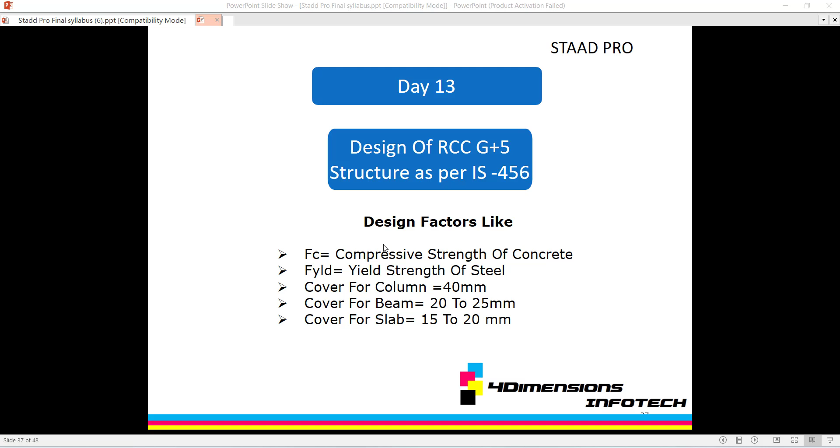Clear cover for column is 40 mm, clear cover for beam is 20 to 25 mm, and clear cover for slab is 15 to 20 mm. You should know these values first, only then can you design the structure.

Clear cover means the distance between the column and the bars - that is called clear cover. There are minimum 4 bars we use for the rectangular column, and for the circular column we use minimum 6 bars.

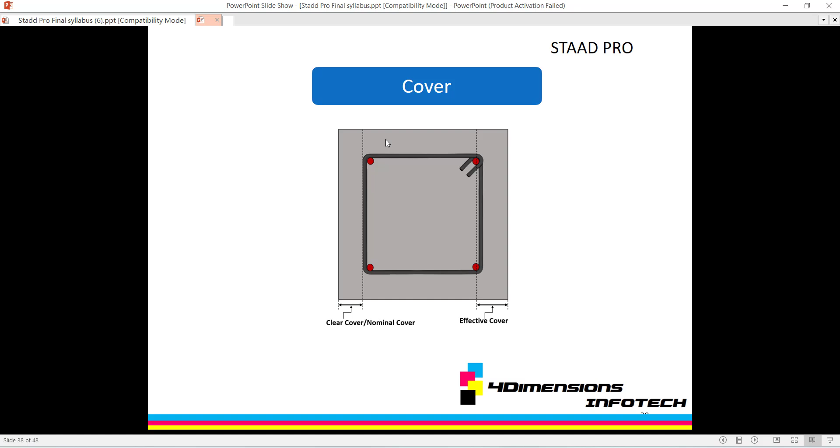So now let's see the design for this. In STAAD Pro, after opening, click on new project, set a new project, then add and give it a name for RCC design.

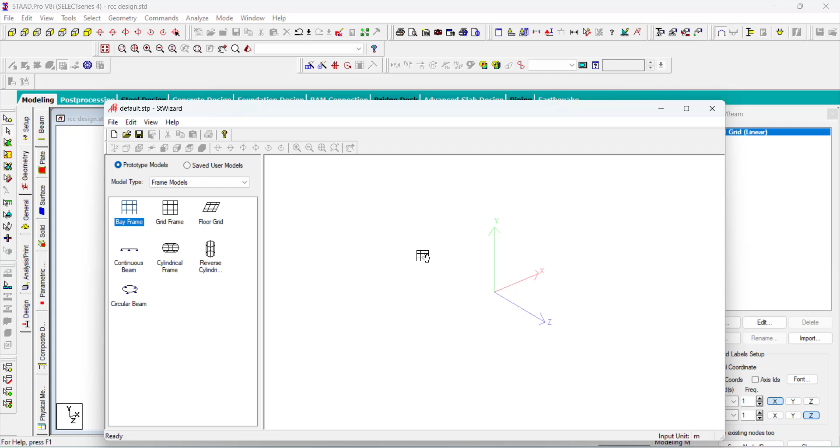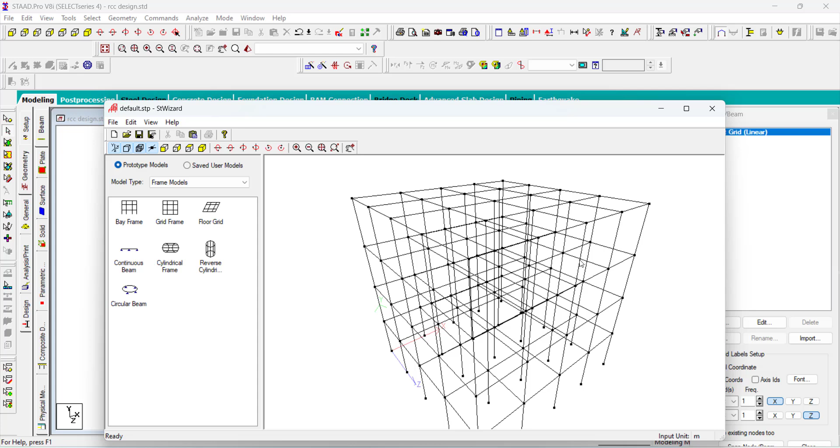Number of bays along x direction, along y direction, and along z direction are 4. Click on apply, and now I want to import this into the main model. Click on close option, and then it asks would you like to transfer or merge this prototype into STAAD Pro?

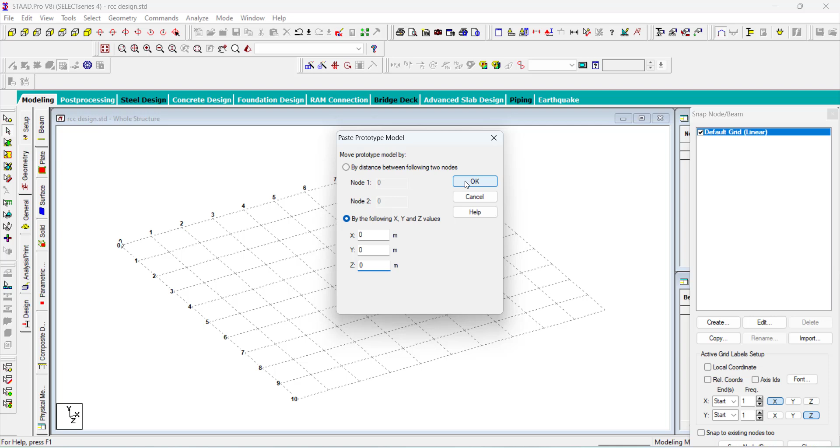If you want to check this, just click over here and check the parameters - 12 meter and height is of 12 meter, and this distance is of 3 meter, and this one is also of 3 meter. So like this way, if you want to remove, you can click over here.

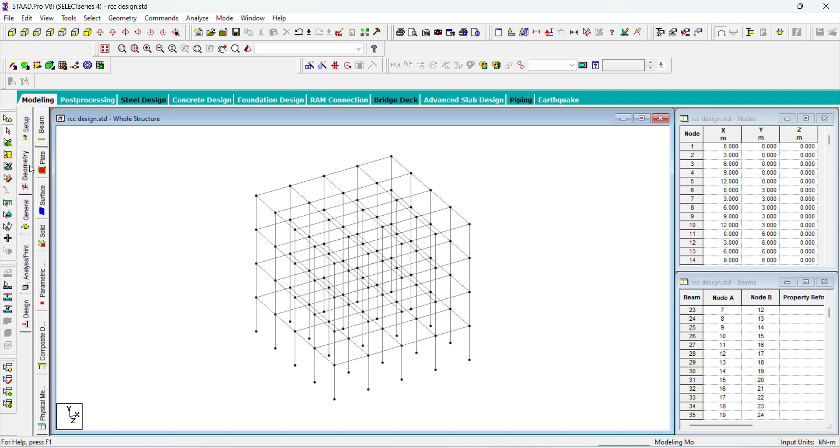Now I want to assign the property first. So we have created the geometry - like this is the geometry. Then the next step is assign property.

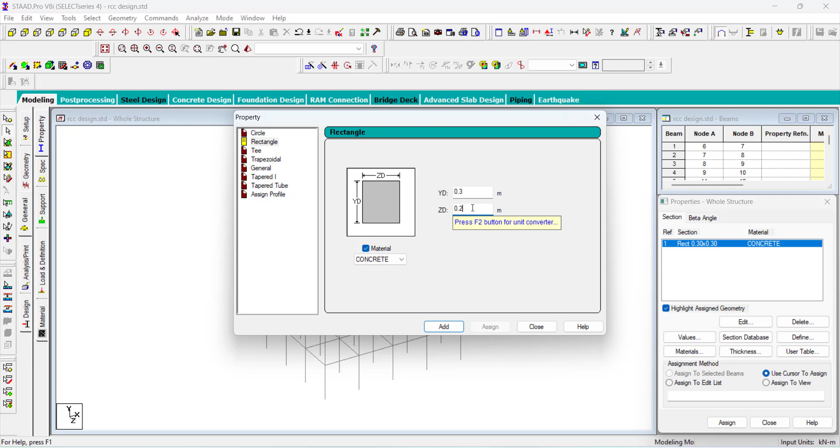For that purpose, just click over this part, select option and then click on beams parallel to y direction, and then click on assign to selected beams and assign yes.

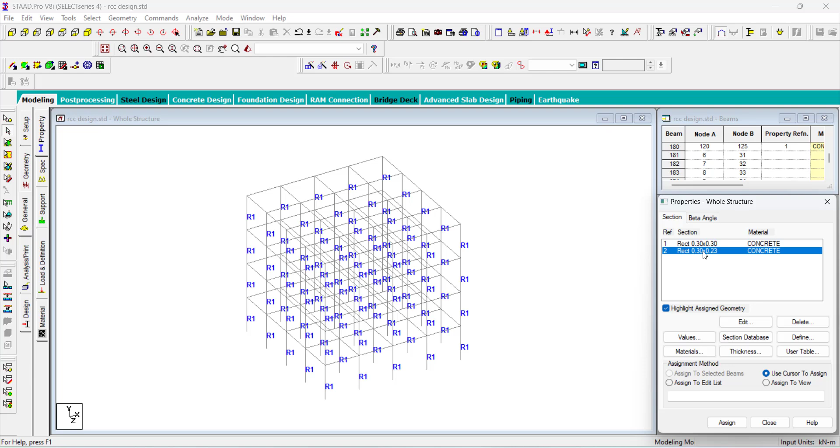Then select this particular rectangular cross section as 0.3 by 0.23, and then click on select option, beams parallel to x and beams parallel to z direction, and then click on assign to selected beams and click on assign yes.

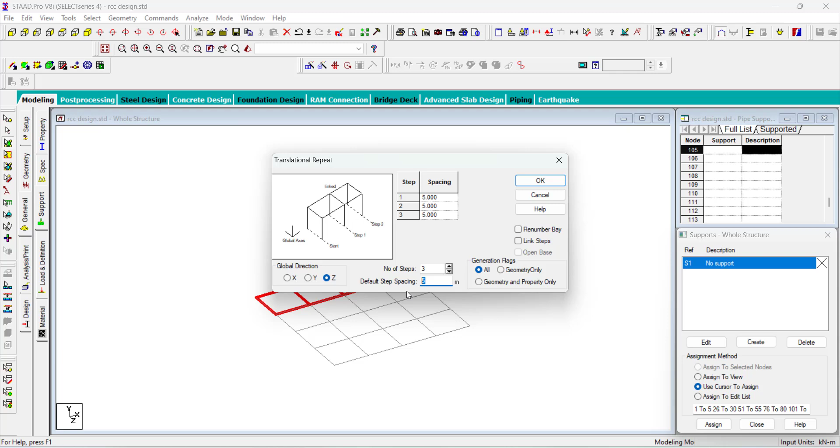Now I select this total 4 and then click on translational repeat. In the z direction I want to assign number of steps are 3 and default spacing is 3, then click on OK.

After selecting this, like this way you can see the plates we have added. If you click on 3D view, so this one is a 3D view.

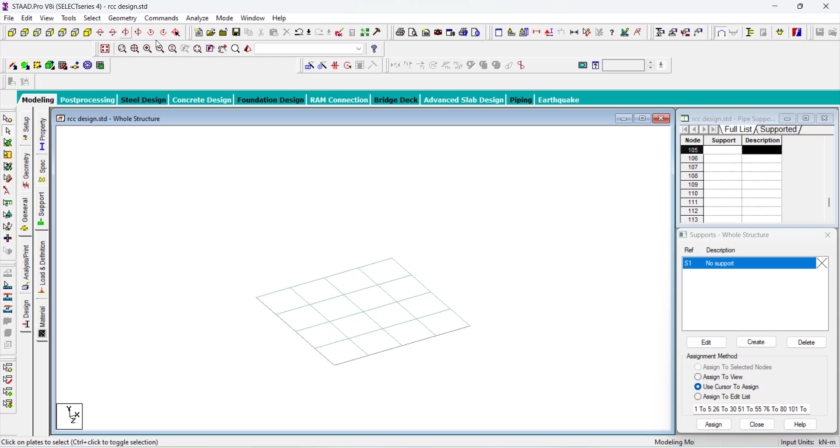Now we have to completely add it on all floors. For that purpose, here we have selected whole geometry. After clicking on whole geometry, click on plate cursor, select all plates, then click on translational repeat, select the y direction, number of steps are 3 and default step spacing is 3. Click on OK.

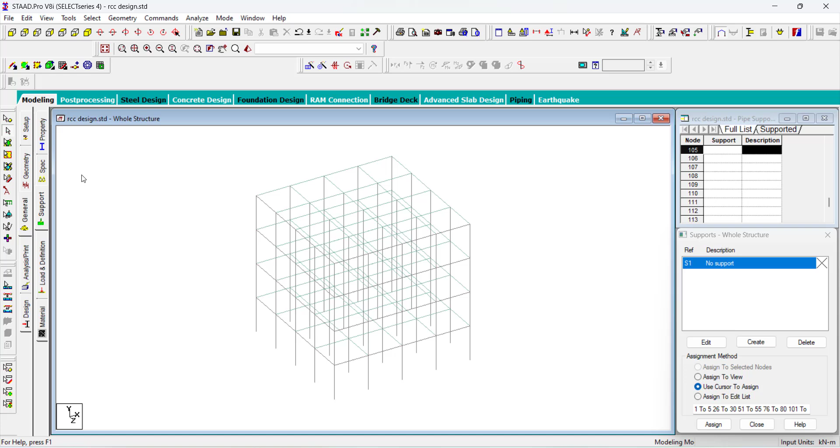Click on property and set the thickness of plate as 0.15 meters. So click on 0.15, concrete add, click on close, select this and then click on select plate cursor.

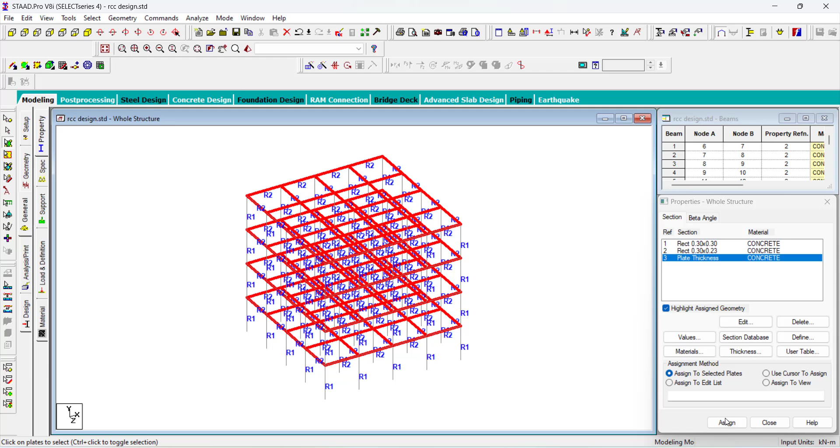Select the whole plates and then assign to the selected plates. Click on assign, click on yes.

After assigning plates, now we need to add support. Click on support, click on create option, click on fix support. Select this support, click on the front view.

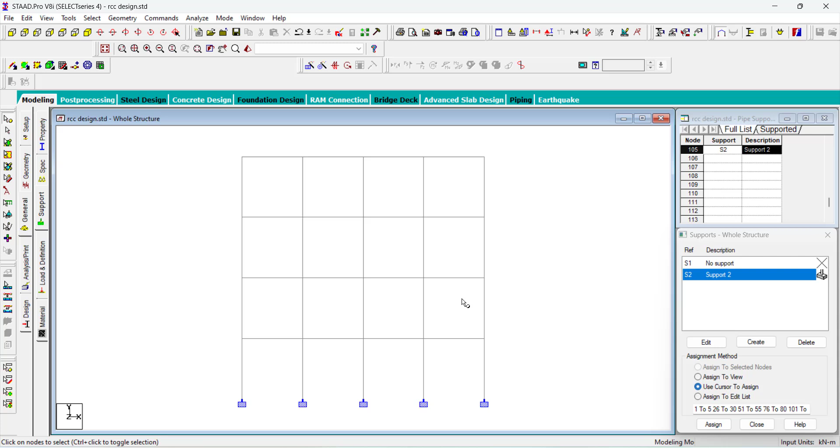Select the nodes and then assign to selected nodes, assign yes, and now click on 3D view. So like this way we can apply the property application and support application. After that you can add load and definition. So click on load and definition.

If it is a seismic zone, then you have to apply seismic loads. And wind load also you can apply.

So just click on load case details, click on add option. Now I want to apply the dead load. First for this DL, click on add, then click on close.

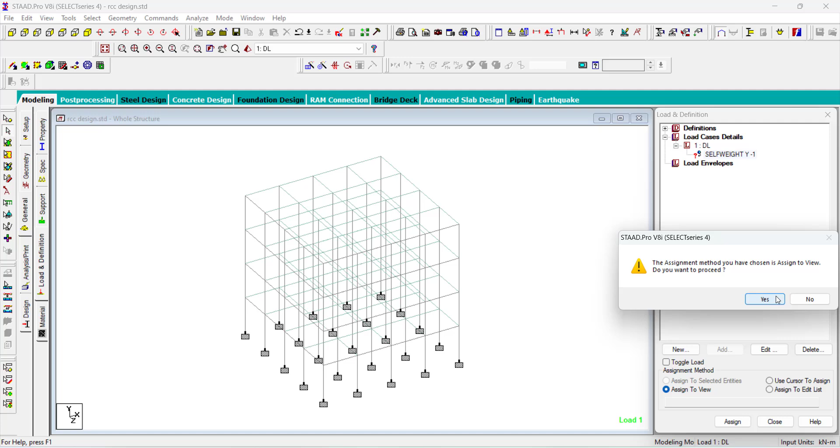In the dead load we have to apply self weight. So self weight is of y and -1 is the factor. Click on add and close. Then select the self weight and then click on assign to view and assign option. Click on yes. After assigning, we need to apply load, apply live load.

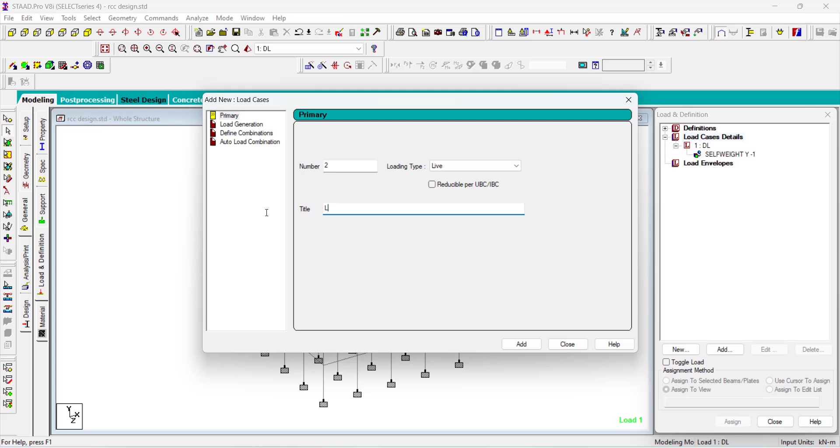Click on add and close, select this live load and then click on add option. Now I have to apply the floor load for this particular part.

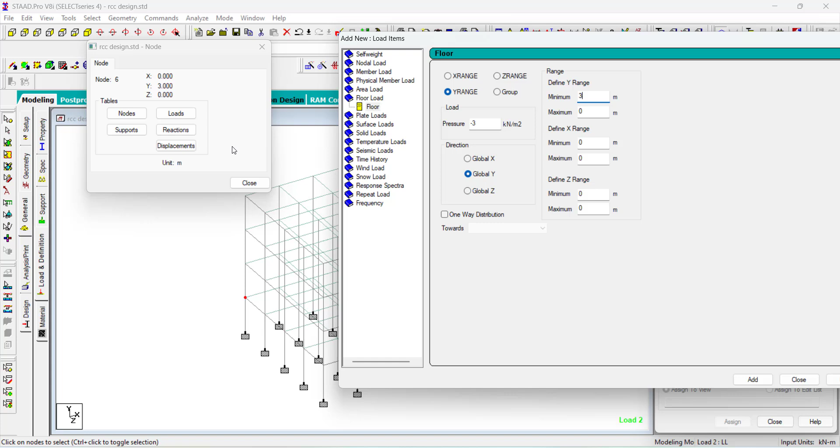So y is 3 and x and z is 0, and then click on the opposite corner. So x, y, z both are 12. So maximum range is x, y and z is 12. Here we have placed 12. After taking 12, click on add option.

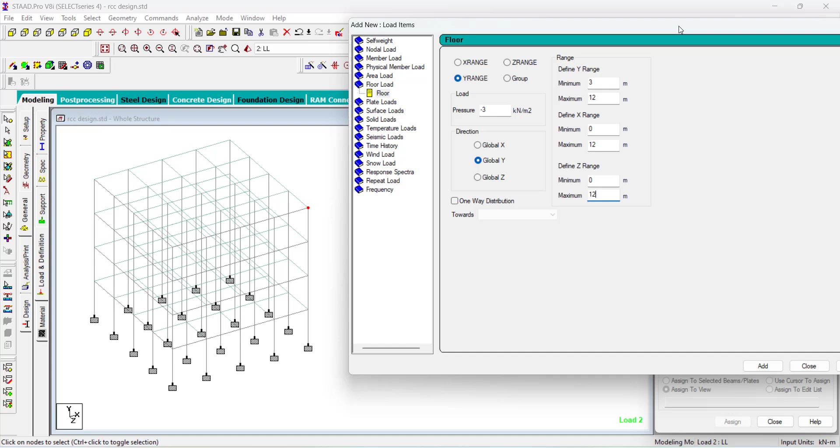Just select this, so this is the live load. After applying live load, we go for the load combination.

For that purpose just click on load case details, click on add option, then select the define combinations. Go through there, after clicking here, just add the factor as 1.5, as we already know the factor, so that we can edit this.

If you don't know the factor, you can go with auto load combination, select this Indian code and click on generate code, and then you can use this. But we already know the factor which is 1.5, so from here you can edit it to 1.5.

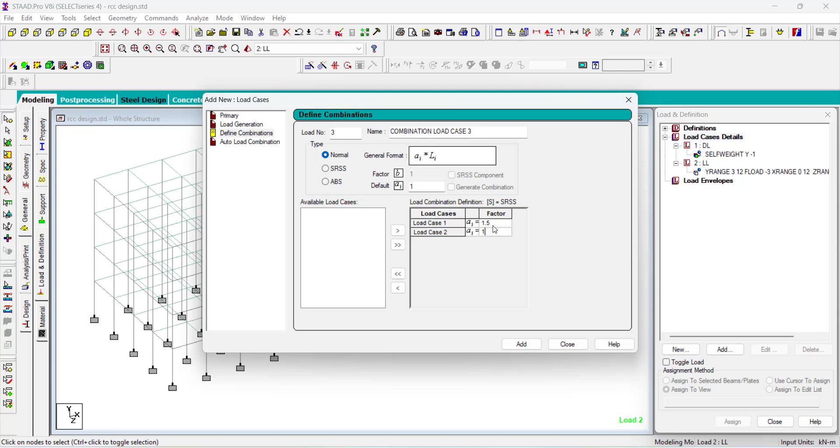So click on add and then click on close. So this one is the load factor. Now we go for the analysis and print. This one is the fourth step.

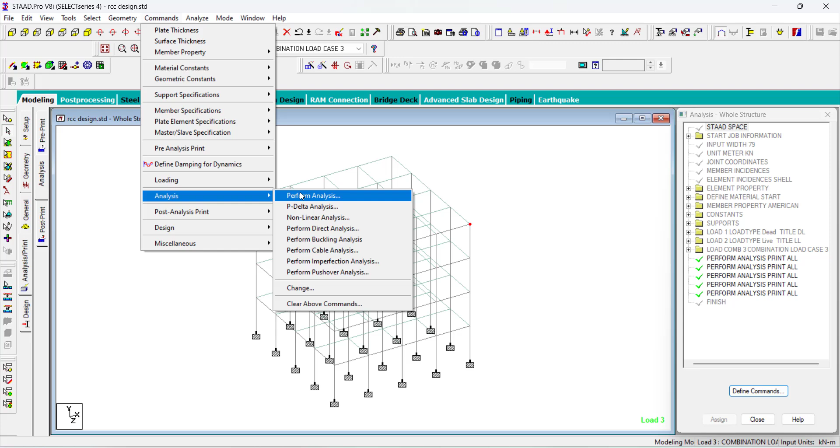So after analysis print, click on add and all and add, and then click on close. Then command analysis, perform analysis, click on all, click on OK. Then click on analyze, run analyze, click on save option.

So make sure you have 0 errors. Click on view output file, click on done, and then

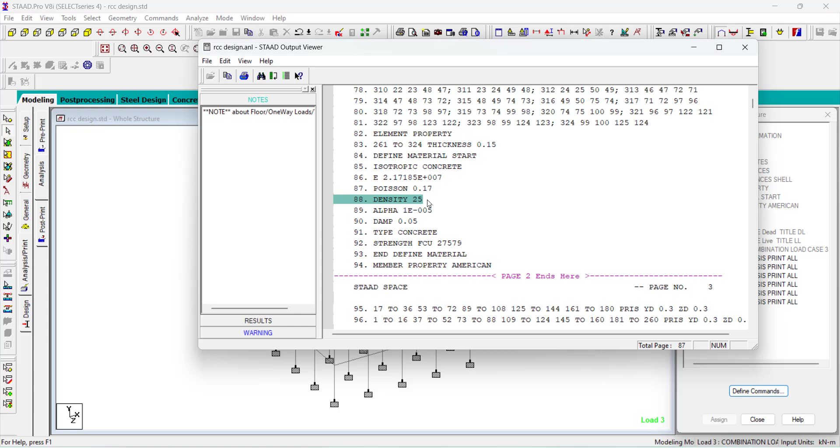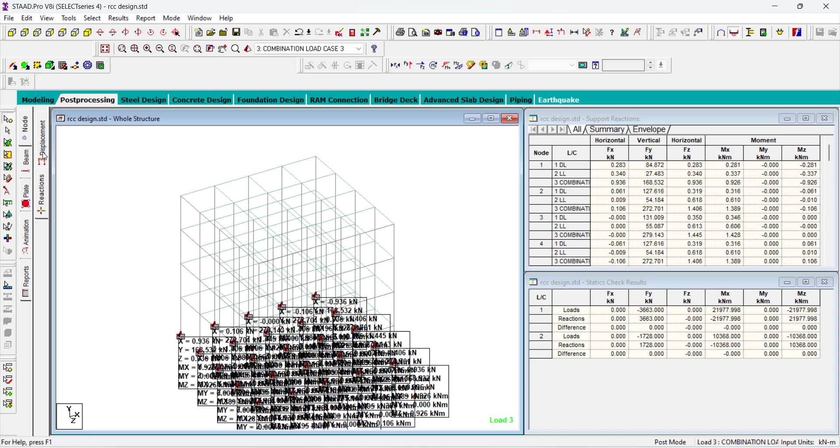Now we go for the next which is post processing mode. Click on post processing, select all and then click on apply and click on OK. In that you can see the reactions, displacement, beams, number of stress on plate by clicking over here as a maximum absolute and click on apply and OK. So this one is the maximum stress you can see.

Now we go for the animation, click on animation and then click on deflection option, then click on apply and OK. अगर आपका डिफ्लेक्शन आ रहा है तो आपको प्रॉपर्टी चेंज करनी पड़ेगी, और अगर नहीं आ रहा है तो

यू कैन गो अहेड। देन द नेक्स्ट इज ऑफ डिजाइन। So click on modeling option and then click on design option. This one is the last part, last fifth part. So click on design option. Design option पे क्लिक करने के बाद

If your structure is of steel, like it is a truss tower, just go through steel option. If your structure is of concrete, click over the concrete. If your structure is for timber or aluminium, just click over it. If you added a shear wall in your structure, just go through it.

So now our structure is of concrete. सो क्लिक ऑन कॉन्क्रीट डिज़ाइन। अब हमें कॉन्क्रीट डिज़ाइन करना है, सो इसके लिए कॉन्क्रीट पे क्लिक करना पड़ेगा। कॉन्क्रीट पे क्लिक करने के बाद चूज IS 456 कोड। अगर आपका यहाँ पे नहीं है तो आपको यहाँ से चूज करना पड़ेगा। सो IS 456 पे आने के बाद देन यू हैव टू सिलेक्ट द पैरामीटर्स।

अब पैरामीटर्स सिलेक्ट करने के लिए आपको सारे पैरामीटर्स लेने की ज़रूरत नहीं है, वी हैव टू चूज दिस। सो यहाँ पे क्लिक करने के बाद हमें क्लियर कवरेंस चाहिए, सो क्लियर डिस्टेंस फ्रॉम सरफेस टू मेंबर वी हैव टू ऐड। देन यहाँ से FC कॉम्प्रेसिव स्ट्रेंथ ऑफ कंक्रीट वी हैव टू ऐड। देन FY मेन यू हैव टू ऐड, दैट इज यील्ड स्ट्रेंथ ऑफ मेन रेनफोर्समेंट। यील्ड स्ट्रेंथ ऑफ सेकेंडरी रेनफोर्समेंट इज ऑल्सो यू हैव टू ऐड।

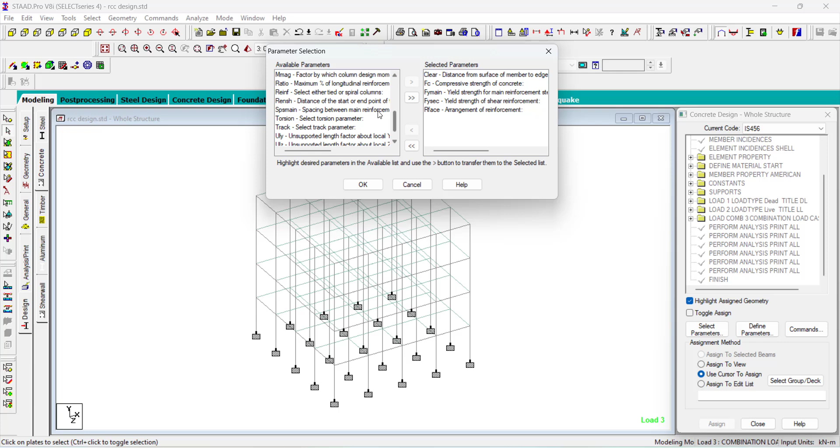एंड देन यू हैव टू ऐड फॉर RFACE, that is arrangement of reinforcement you have to add. So like this way you can add these parameters and then click on OK option. After that you have to click on the define parameters. Just go through the define parameters.

Now we have to add a clear cover for the column. For column it is 40 mm, so 0.04 in meter. Click on add option. For beam it is we consider as 25 mm. जो मैंने स्टार्टिंग में ही आपको बताया है कि कॉलम के लिए, बीम के लिए क्लियर कवर क्या लेना है और स्लैब के लिए हम क्लियर कवर क्या लेते हैं। सो फॉर बीम के लिए अब हमें ऐड करना है 25 mm, सो 0.025 हमने ऐड किया है।

क्लिक ऑन ऐड ऑप्शन। ऐड करने के बाद वी हैव टू ऐड फॉर द स्लैब, सो 0.015 हम ऐड करेंगे। क्लिक ऑन ऐड ऑप्शन। क्लियर कवर ऐड करने के बाद क्लिक ऑन FC for the compressive strength of concrete you have to add. The minimum compressive strength of concrete is of M30. So यहाँ पे 30 and then multiply it with 1000, so 1 2 3, इस तरह से आपको ऐड करना पड़ेगा।

So click on add option. FYMAIN आपको ऐड करना पड़ेगा, so 415 into 1000, so 1 2 3, click on add option. Then सेकेंडरी रेनफोर्समेंट आपको ऐड करनी पड़ेगी, सो उसके लिए भी हम 415 इंटू 123 सेट करेंगे। क्लिक ऑन ऐड ऑप्शन एंड देन क्लिक ऑन आर फेस ऑप्शन।

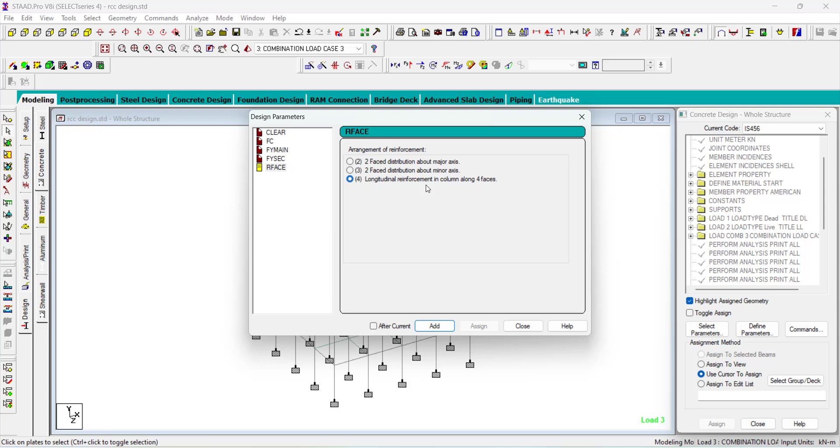सो यहाँ से लॉन्जिट्यूडनल रेनफोर्स, यहाँ पे आपको क्लिक करना पड़ेगा फॉर longitudinal reinforcement in column along 4 faces. Click on add option and then click on close. Now go through here and now we have to assign this to the particular part. So click on the clear cover for column.

Select this and then click on beams parallel to y direction, then assign to selected beams and plate. Now we have to assign this for the column separately, so it will be considered only for the column. Click on assign option and close.

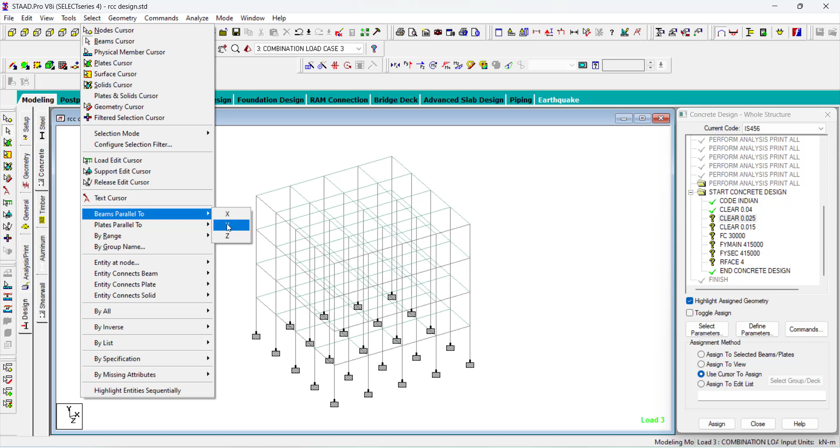Then you have to assign this for beams, so select this, click on select option, click on beams parallel to x, click on beams parallel to z, and then click on assign to beams and plate. Click on yes option.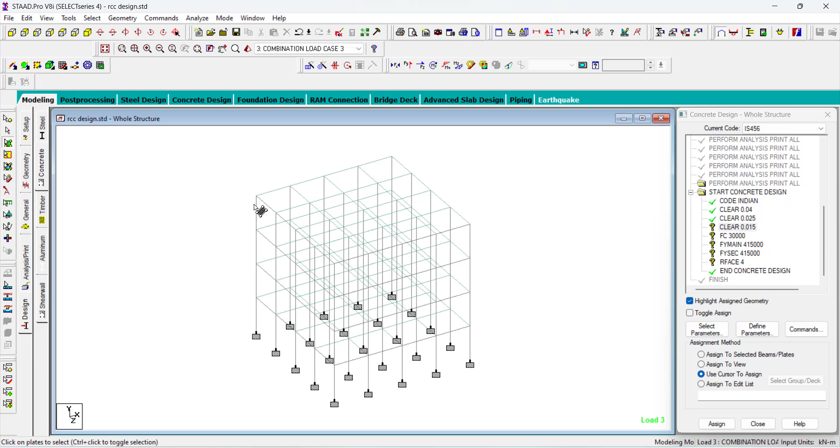Select this for the plates we have to apply. The plates applied here need clear cover assigned. So for that purpose select this particular plate cursor and then select completely plates, then assign to selected plates and assign option, then click on yes option.

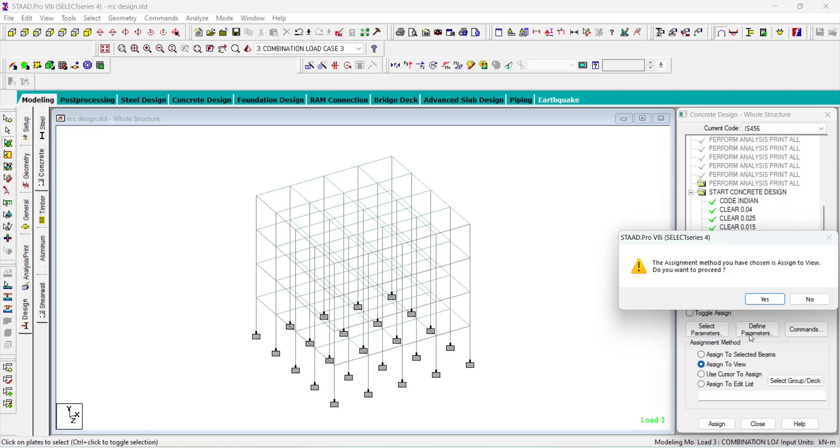Now we have to assign FC, FY main, FY secondary members and R face. This one we apply to the whole view. So click on assign to view, click on assign, click on yes. Click on this assign to view, assign yes. One more time click on this assign to view, assign yes.

Then we go for the commands. Click on commands option, and here we need to set for the design beam. Whatever design we need to extract, we'll give commands for that. We need the beam design, so click on add option.

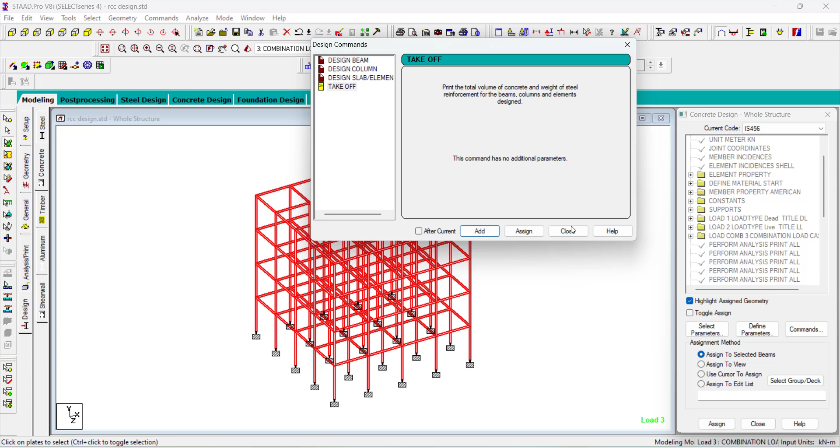If we want column design, click on add option. Then for slab or element design, click on add option, and for take off, click on add option, then click on close option. Just drop down this part and then assign design of beam, design of column, design of element, and concrete take off.

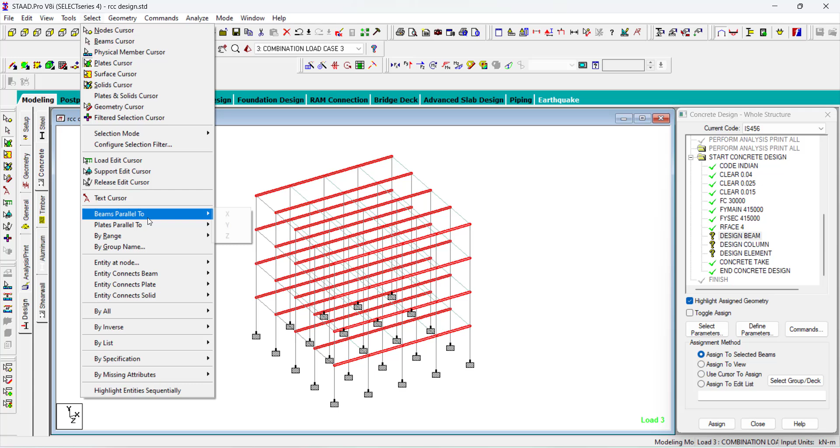So we need to assign this here. Now I have to assign this design beam. Click on the design beam, click on select option beams parallel to x, click on select option beams parallel to z, then assign to selected beams, assign yes. For design column, select option beams parallel to y, click on assign to selected beams, assign yes.

Then the next one is for the plates. Select this option, click on the plate cursor, select all plates in the structure, then click on assign to selected plates, click on assign, click on yes.

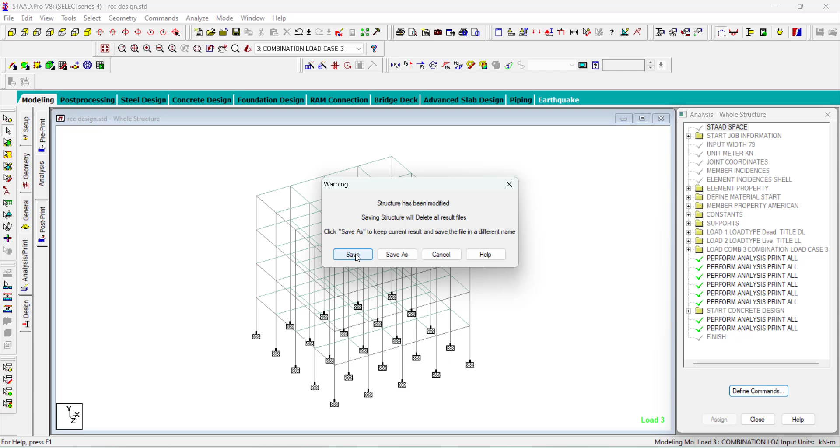So make sure you have 0 errors. Click on output file, click on done option, and then here your output comes and your steel is also given to you.

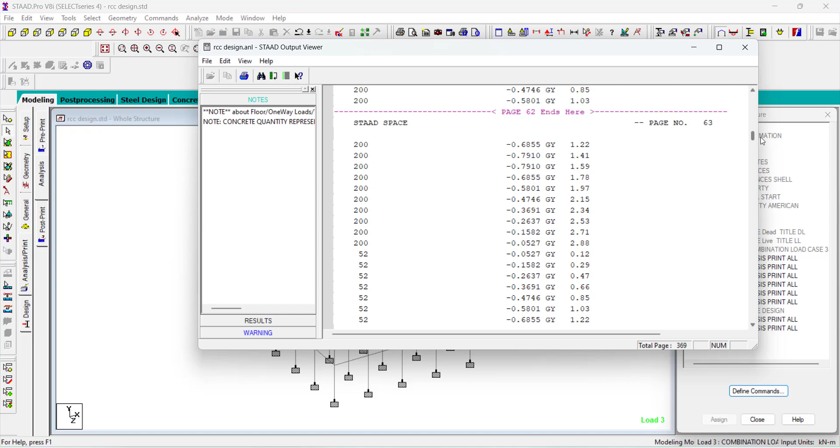So this one is your output. Here is the reinforcement: top reinforcement, bottom reinforcement, shear reinforcement, reinforcement is given here. So you can see the complete details here for your model.

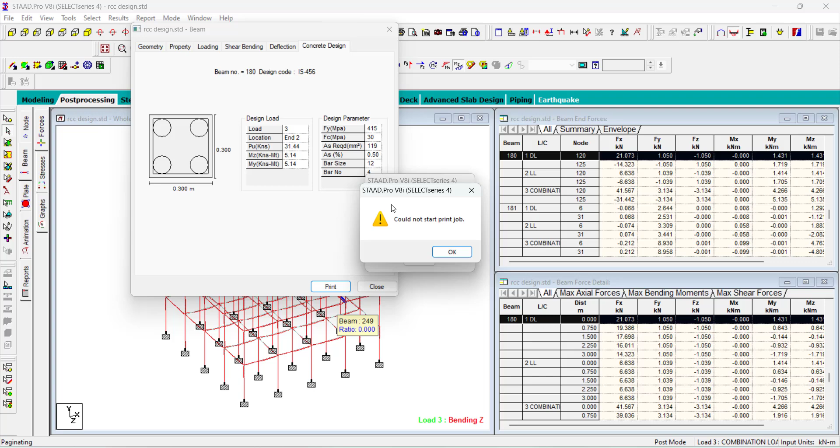For the beam structure, just double click on beam, click on concrete option. This way your beam structure will be displayed. The cross section will be shown and details are given here, steel details too, according to our design parameters 415, 30, length of beam, depth and width - these are the values. So these are the details. If you want to print it, you can click over here.

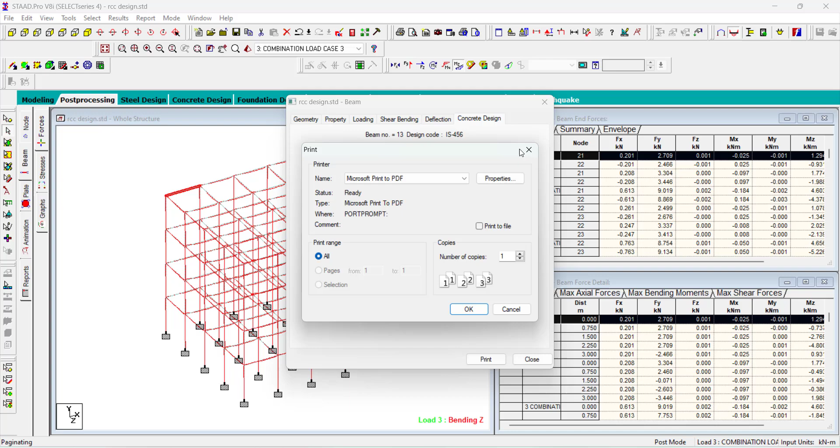Then animation, deflection, click on apply and OK. This way you can see the design part. So this is all about day 13. In the next video we learn day 14 commands. Thank you.